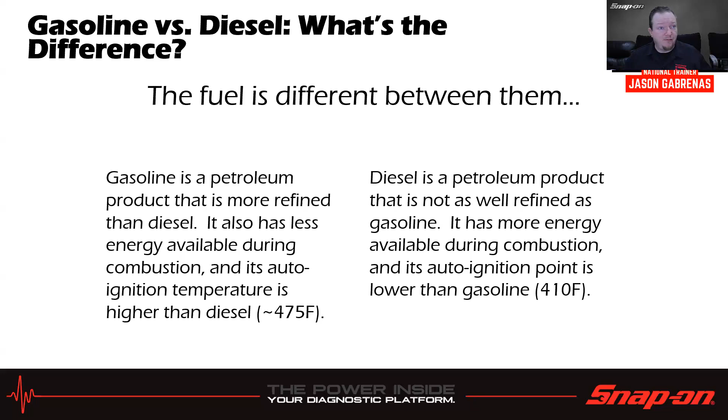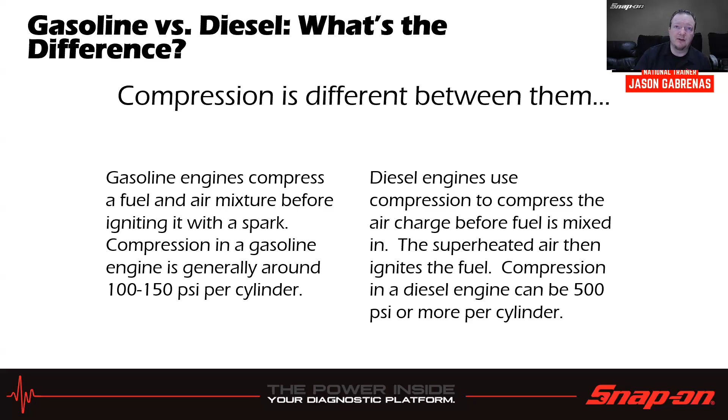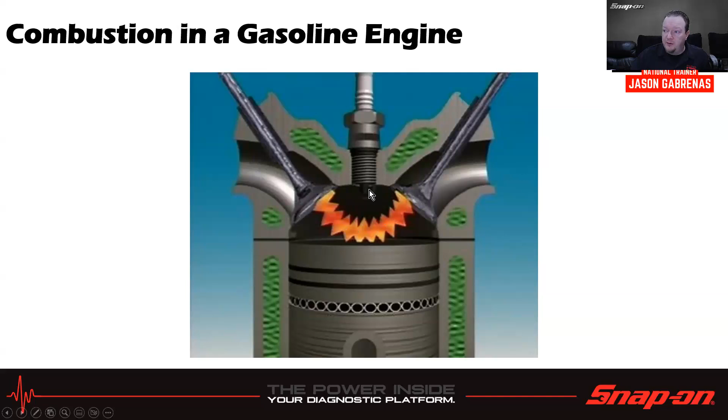The way they use compression is different as well. Gasoline engines compress the fuel and air mixture before igniting it with a spark. Compression in a gasoline engine is generally around 100 to 150 psi per cylinder, versus a diesel engine, which uses compression to compress the air charge before fuel is mixed in. It gets superheated air in there, then squirts the fuel in, and it hits the auto-ignition temperature and ignites. Compression in a diesel engine can be 500 psi or more per cylinder, just because of how the cylinder heads are designed. For example, in a gasoline engine we have a decently large combustion chamber in the cylinder head - the piston goes up, compresses the air and fuel, and then we light it with a spark. Versus a diesel, the piston is basically the combustion chamber, so it goes almost flat to the head, and then it sprays fuel into the piston, and because of the superheated air in there, it ignites. By design, though, this can create NOx emissions and can run kind of lean, so we have ways of controlling that we'll talk about later.

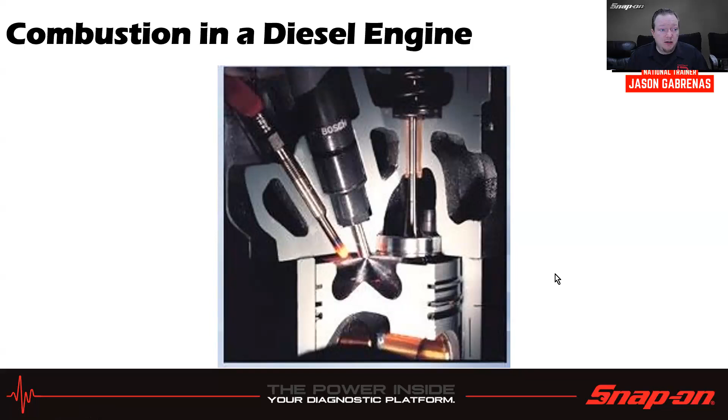The first part, though, we're going to talk about the fueling system, because that's one of the major differences between them.

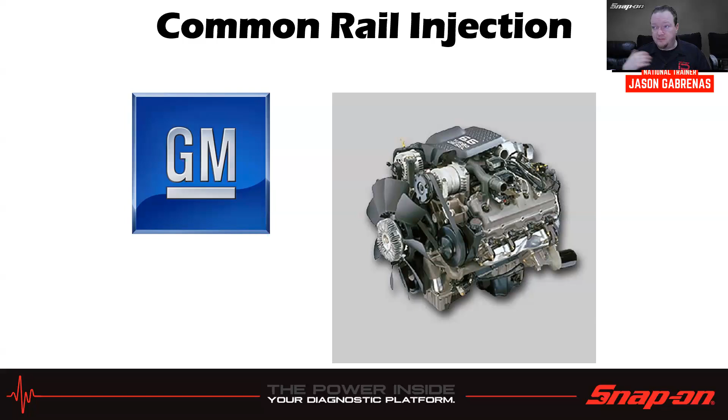And you know what? The lines are blurring a lot now. With gasoline direct injection engines, a lot of these principles and setups are going to be very similar between a diesel and gasoline, because many diesel engines are going to be direct injected. So, for example, this common rail injection that they would use on the Duramax, on the GM, and also the Dodge 5.9 and 6.7, they also use common rail injection.

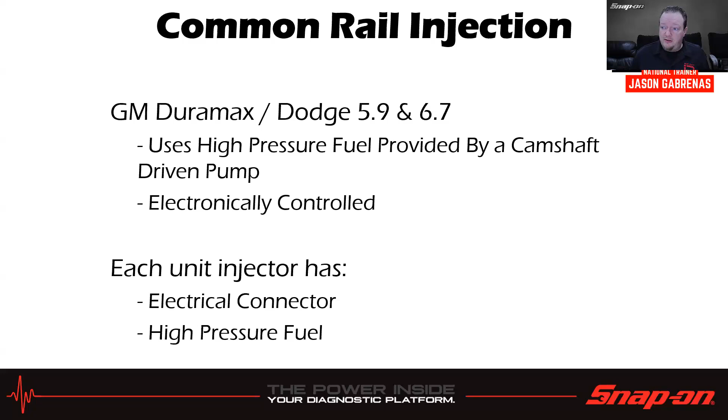These are going to be more your fairly standard poppet style injectors. They use high pressure fuel provided by a camshaft driven pump, so it has a lift pump that increases the pressure. It's driven off the engine, and of course the injectors are electronically controlled. Each unit injector has an electrical connector and high pressure fuel at it.

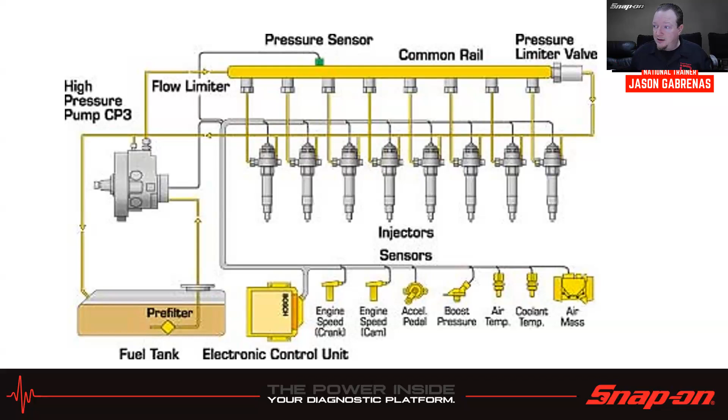You ever seen a water jet? Same type of principle, right? So it's very, very high pressure, and it can cut off digits and so on. So you don't want to mess around with that.

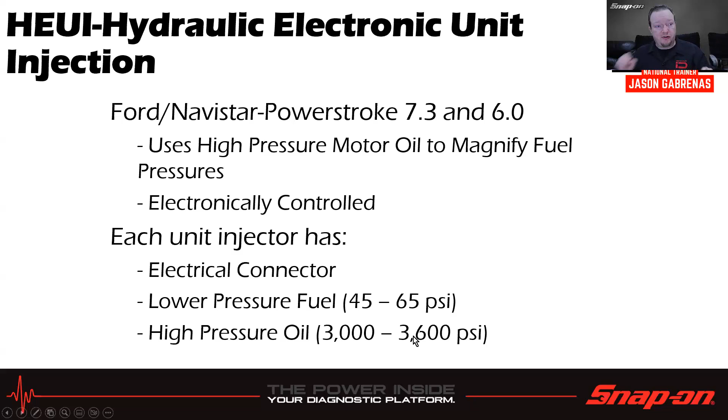Ford, on the older Fords, they use what they call hydraulic electronic unit injection. So what this does is it uses high pressure motor oil to magnify the fuel pressures. The fuel going in is only your standard, maybe gasoline level, 45 to 65 psi. And then they use high pressure oil inside the injector in order to increase the amount of pressure on the fuel coming out the other end. So this is kind of how they got around it, right?

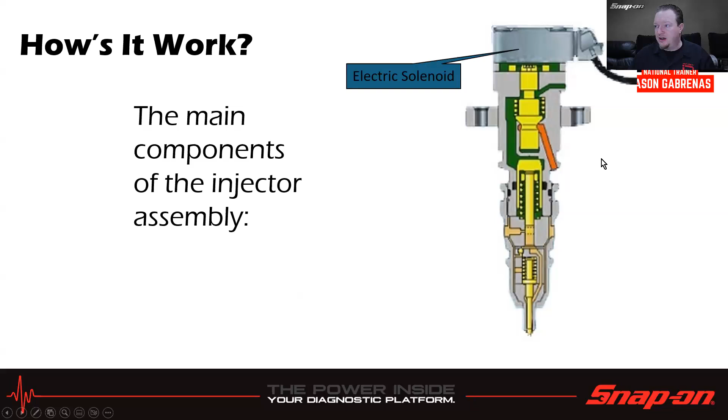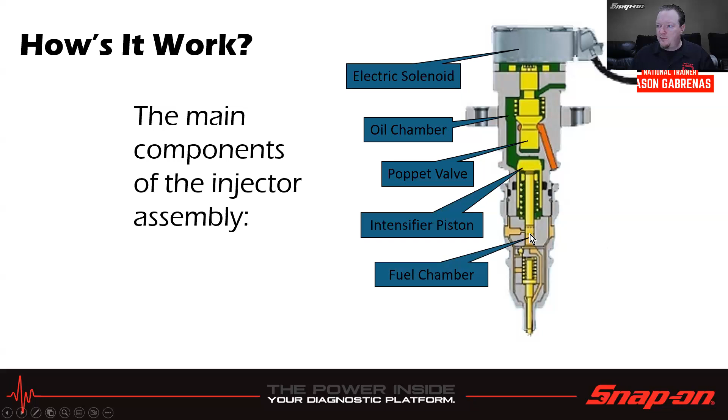The main components of the injector assembly are going to be the solenoid at the top, which is going to open and close this guy. We have the oil chamber in here, which the oil will flow through. Poppet valves, which are going to open and close. Intensifier piston, which is going to increase the amount of pressure on the fuel. Fuel chamber in here, and then the nozzle down here at the end.

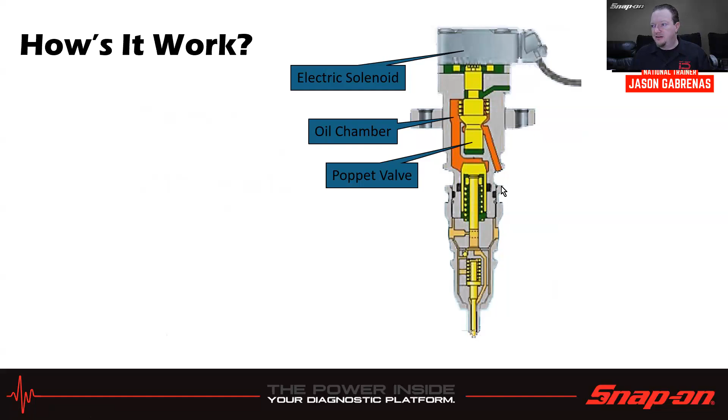The solenoid will open up the oil chamber, allowing that high pressure oil to flow in. We have O-rings around here, and the oil flows in from the side. It's going to kind of push up on this, and then push down on this piston. As it pushes down on the piston, there's going to be fuel down here on the bottom part. And as that fuel goes in here, the pressure is going to increase because we have a large surface area there and a small surface area there, due to multiplication of forces.

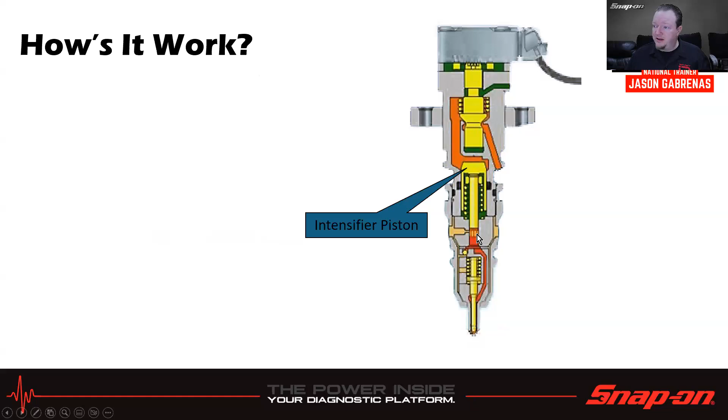It is going to take that force and multiply it and bring it down here and increase the pressure of the fuel. Once that fuel pressure is able to overcome the spring tension here, it will push the nozzle back and it will start spraying fuel. And that's how that works. Right, so there we go.

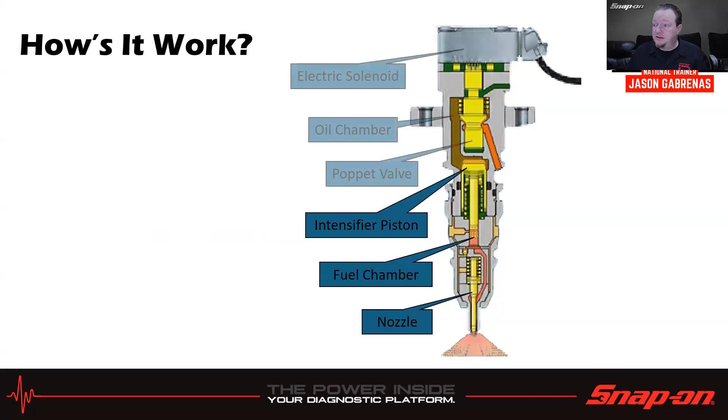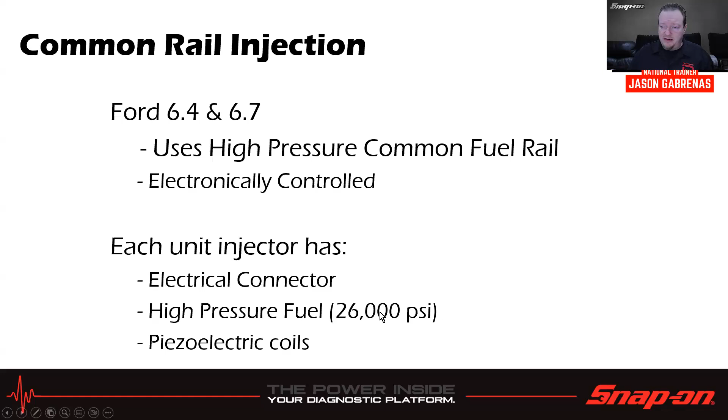Now the newer Ford engines, 6.4 and 6.7, they also went to a high pressure common fuel rail, but they use a different type of injector. I'm sure some other engines use this injector too. We see these a lot in the gasoline direct injection engines. Each injector has an electrical connector, high pressure fuel, 26,000 psi or so, and piezoelectric coils. So that's a slightly different working injector.

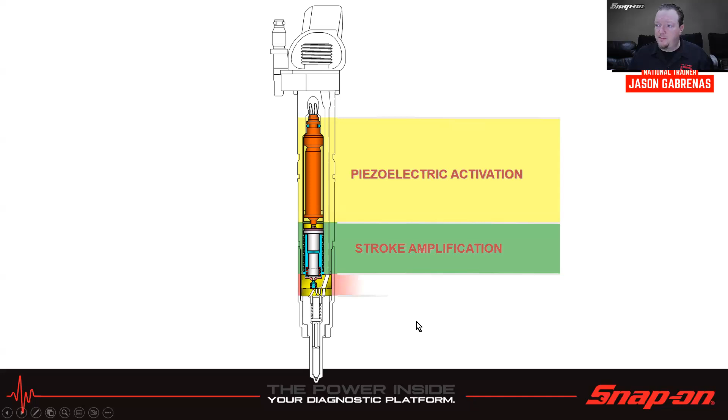We have stroke amplification in here that's going to work on a similar principle to those hydraulic units, where it's a small stroke on one side, bigger stroke on the other side due to multiplication. Hydraulic control in the middle, or kind of towards the end, and then we have fuel atomization down at the very end by the nozzle. So if we were to take a look at the piezoelectric actuator, we have a piezoelectric stack, which is going to be these thin wafers.

Now, if you know how a knock sensor works, maybe you do or maybe you don't, but a knock sensor works by when it vibrates, when it has motion applied to it, it generates an electrical current. We can do the same thing in reverse. We put an electrical current in, and it's going to make it move. So instead of taking mechanical motion and turning it into electricity, it takes electricity and turns it into mechanical motion. So we apply electricity, they go out. Take the electricity away, they come back in. So by doing this, we can make them move.

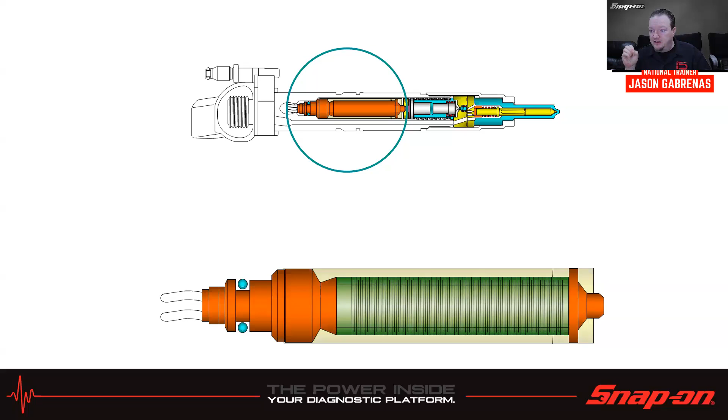Now it's a very small movement, so we need to be able to amplify that movement. So we have this amplification chamber here. When no fuel is in here, it's just going to sit there and go back and forth on the spring, and nothing really happens. Once fuel is in there, however, we can hydraulically couple these two pieces together, and it's going to change the stroke length. So I have a small amount of stroke going in, a large amount of stroke going out. It pushes, and it pushes the other end because we have the diesel fuel in the middle.

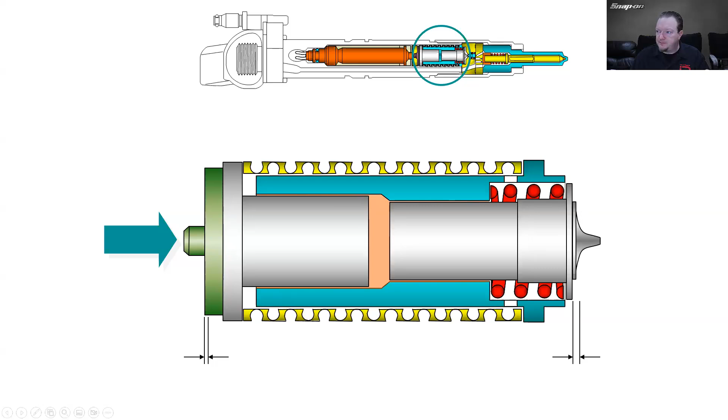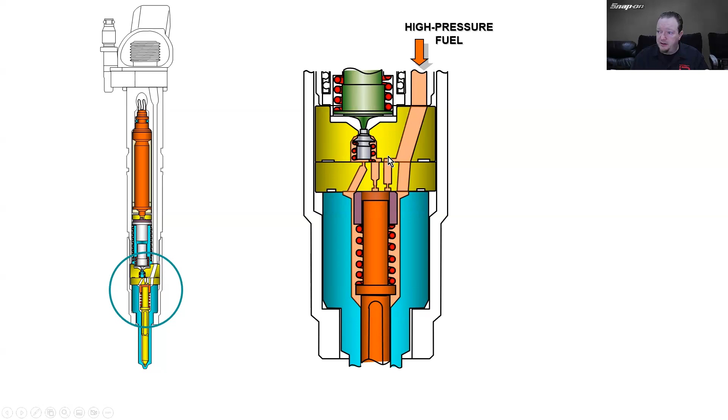So it intensifies it, just like on those hydraulic units. We have high pressure fuel going in, and that increases the stroke. So we have the high pressure fuel going in here into the system, and then it goes around and pushes down on the pintle to keep it closed. When we remove that, however, by moving the stroke back and relieving the pressure that's holding it closed, it allows the fuel to get around and allows it to spray.

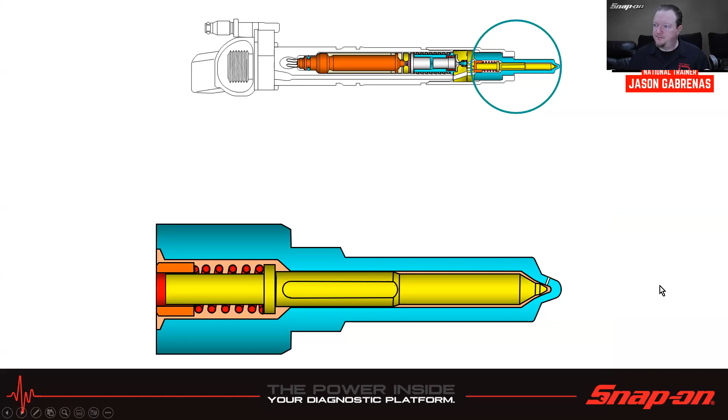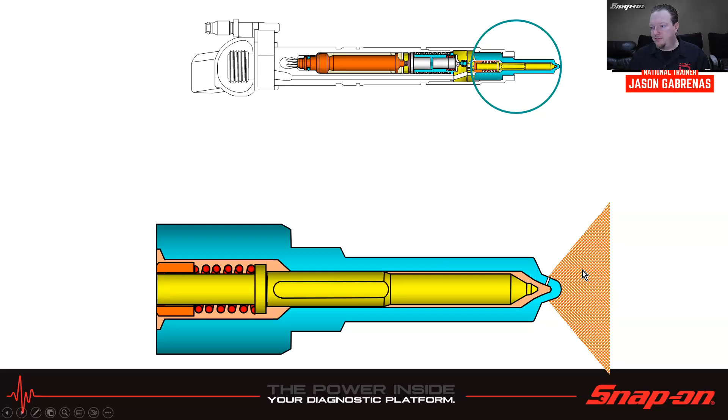So it's going to look something like this. Fuel holds it closed. When we relieve that fuel, it's going to do this, and then it's going to open and spray, just like that. So if I have high pressure fuel over here, once this opens and moves away, then we open the injector and spray. So it's really pushing the injector backwards, or pushing the nozzle backwards. It does that.

So with your scan tool, many diesels at this point need something done with the fuel injectors in order to get the flow rate correct when you replace them. So injector quantity adjustment is one example on a Ford. You're going to use a 10-digit code on top of the injector. Don't confuse characters like 8 and B, or D and 0.

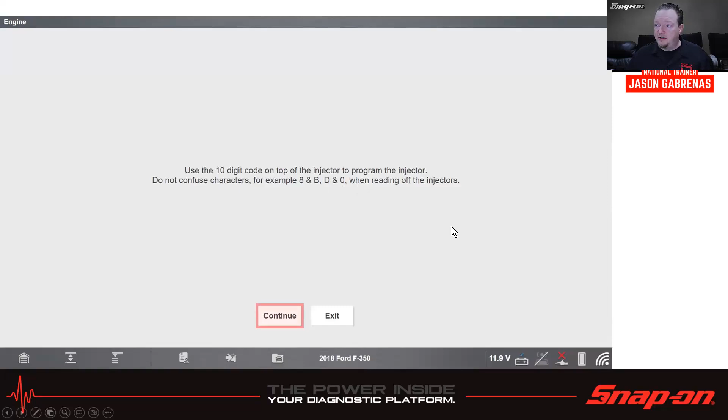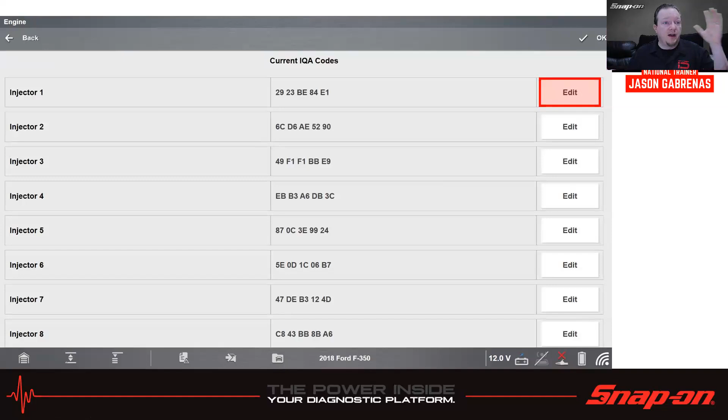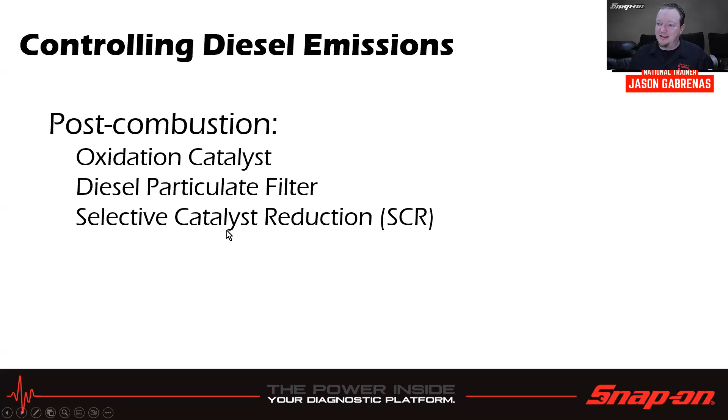So that's one way it's different, but it's very similar if you think about it. In gasoline direct injection and diesel injection, it's going to work very similarly, especially now. No ignition system, though. They do, however, have emission systems, and they are a bit more complex than on your gasoline-powered vehicle, because there's a lot more going on, and a lot more stuff they need to take out of the exhaust. So post-combustion, they're going to take care of it with the oxidation catalyst, the diesel particulate filter, and the selective catalyst reduction system, the SCR.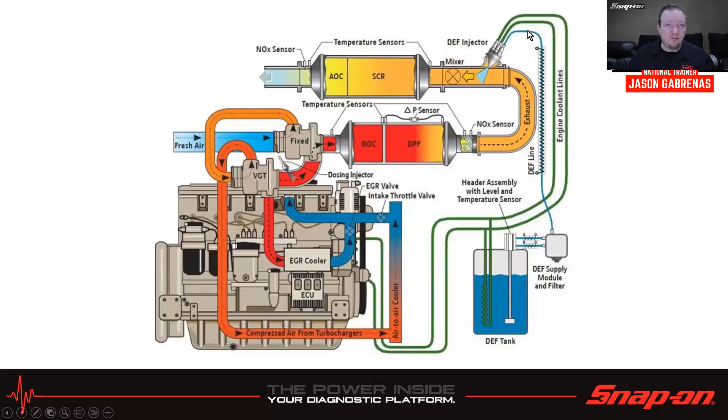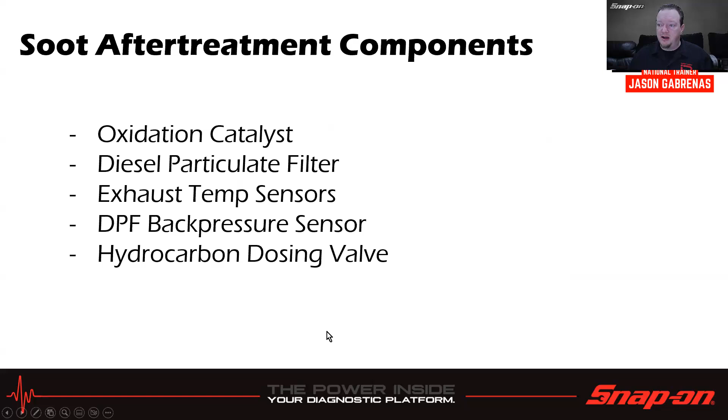So for exhaust after treatment, soot after treatment, we're going to talk about the oxidation catalyst, the diesel particulate filter, exhaust temp sensors, DPF back pressure sensors, and hydrocarbon dosing valve. And the main thing we're worried about in here is the diesel particulate filters, or DPFs.

So then the vehicle would then need to know, all right, I got to burn this off. Now, when I first heard about this years ago, I thought it was pretty wild that this was a thing that they even said, yeah, let's do.

Because what's it doing? So I'm driving down the road. Any of the soot that's in my exhaust gets collected in here. Then it gets filled up to a certain point. So I got a lot of soot in there. And then I'm going to burn it off. So I'm taking a lot of soot and dumping it in one place versus having just a little bit of soot in multiple places driving around, you know?

I don't know. It seems like we're just kind of kicking the can down the road at that point, right? So storing up all these emissions, and then we just burn it out the back of the tailpipe when we do a regen. Right? So I don't know. But that's what they're doing.

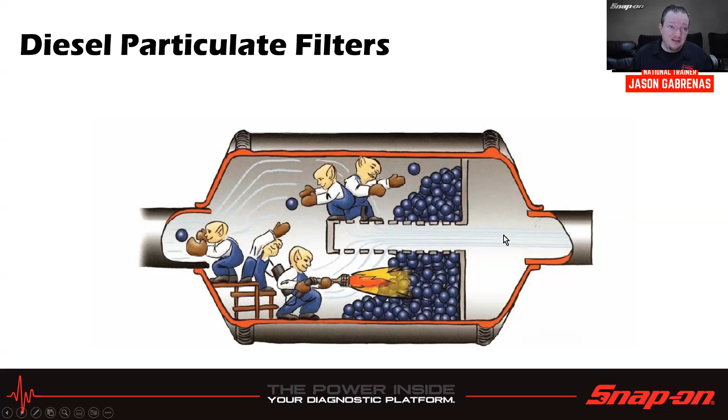And also gasoline particulate filters are a thing now too. So we'll be seeing those more and more on gasoline engines, and it's the same type of principle. So inside those DPFs, there's opposing honeycombs, and they can flow through and collect in these honeycombs.

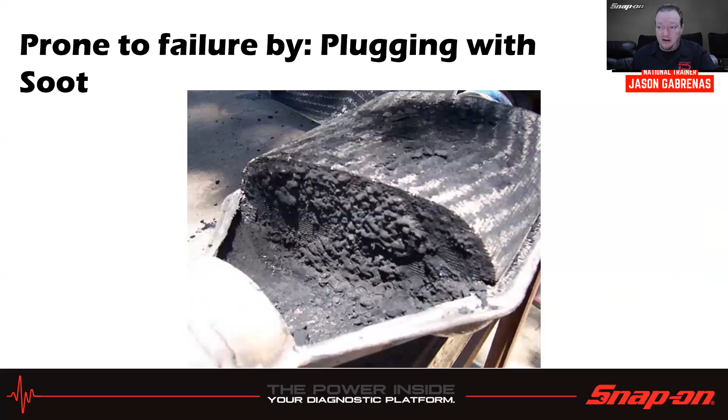But once it's full up, it's full up. And usually once it's full up, you're going to get a code. And usually also when it's full up, you're not going to be able to regen it. You're going to have to replace it. So that could be a problem, and a lack of maintenance could generate this problem.

Speaking of regens, we have a few different conditions where we would regen and remove that diesel, or the soot, from the DPF. So when the DPF temps are high, a passive regen is when the DPF temps are high enough to burn the soot from the DPF without needing extra fuel. Only happens under high load situations, like going up a hill or something like that, or towing, I suppose.

Active regen can be initiated by the PCM or by a scan tool. Extra fuel is going to then be added to the exhaust to raise DPF temps to approximately 1,025 degrees Fahrenheit to burn that off if it gets really hot.

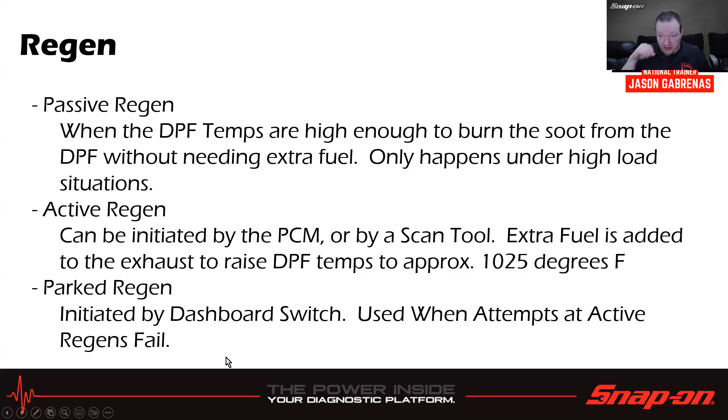And then there's also a parked regen, which can be initiated by a dashboard switch. It's basically the same thing as an active regen with a scan tool. It's going to be used when attempts of active regens fail. So the little switch comes on, and then it just does it as it's parked.

Now, with these systems, with the DPFs and the SCRs, they can be set up in different ways, different configurations. You can have DPF first, or you can have SCR first, or what have you. But we're going to be dealing with a lot of NOx, or a couple NOx sensors anyways, multiple exhaust gas temperature sensors. Hydrocarbon injector, that's what lights off the DPF and heats it up.

DEF injector for the SCR system. There's a differential pressure sensor that goes in there in the middle, and that measures the pressure going into and out of the DPF, so it knows when it's clogged and when it needs to regen. And then, like I said, multiple exhaust gas temperature sensors and so on.

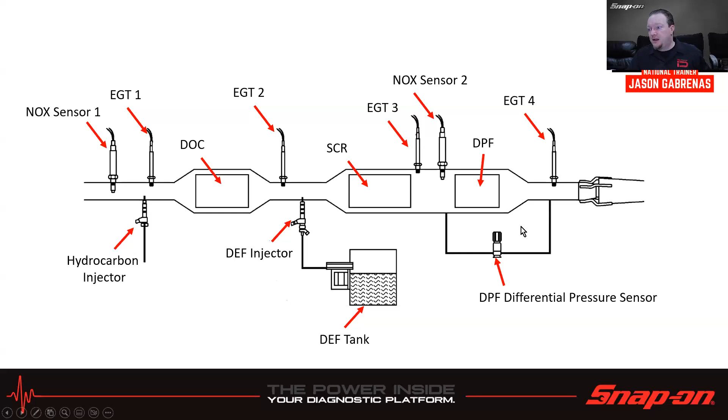So oftentimes, things like the NOx sensors anyways, might need to be reset or relearned on the vehicle. Could be the exhaust gas temperature sensors, could be the injectors. There's multiple functional tests that you might need to use for the DEF system. And differential pressure sensors is ways we can measure that too and test it. We'll see a lot of that in a little bit.

So with those EGTs, there's multiple EGTs, as I said. You're going to have one before it gets into the system, and then multiple along the way through the system, so it can measure temperatures, making sure things are going as they should, making sure the temperatures are correct. So it should be cooler in, then after I light the injector there, it's going to be a lot warmer over here. So I should see warmer over here, and I guess a little cooler over there on the other side after I've burned off the soot. So that's kind of how it works. You're able to see it.

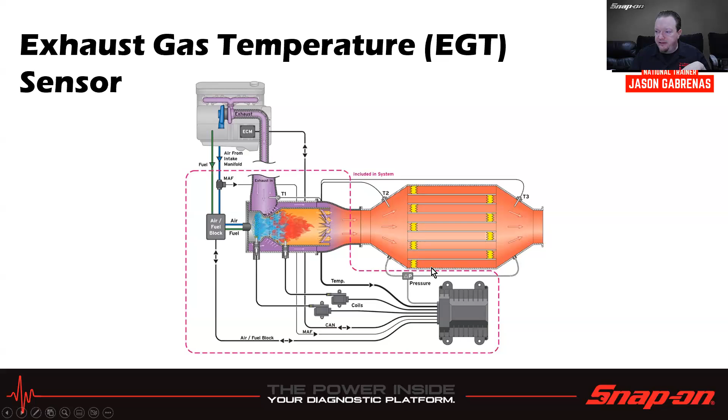Now, the SCR system, which oftentimes is used in conjunction with the DPF, consists of your diesel exhaust fluid, which is 1/3 urea and 2/3 water. That's the blue jugs you see everywhere. Or if you're around, like where I live, there's a gas station down the street that has it right in the pump, with a DEF pump off to the side.

ECU controlled injection, just like any other fuel injection system. 1 gallon urea, or actually wouldn't be fuel, it'd be DEF, but yeah, same idea. 1 gallon of urea treats about 100 gallons of diesel fuel. This is used to allow them to tune the timing. So I added an EGR to the vehicle to reduce some emissions, but then I get a 2% decline in fuel economy by doing that. But by adding an SCR as well, I can either offset it completely, or get a 2% to 5% increase in fuel economy, so I could even gain some fuel economy with that.

So SCR allows return to normal injection timing, which restores the fuel mileage. Part of that, we have the SCR catalyst itself, the decomposition tube, the DEF injector, DEF pump, tank and lines, NOx sensors, and the ammonia sensor. We're going to see why that's important in a minute.

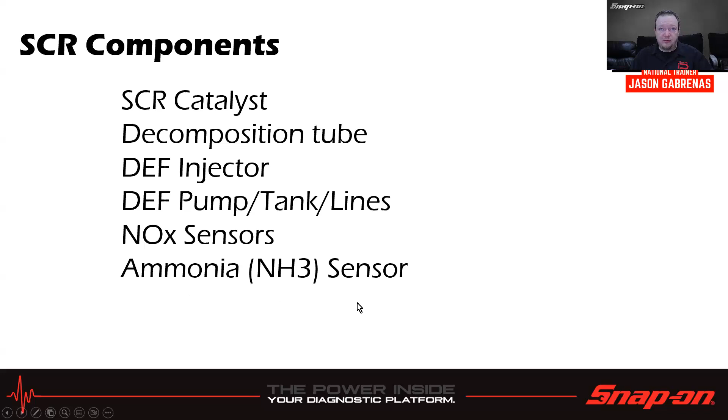Here's an example of what the DEF injector would look like. You see how it's kind of just mounted in the exhaust there, and it just looks kind of like a normal top feed fuel injector. We've got a little quick connect there, and a little 2-wire injector plug, and it's also heated and/or cooled, I guess.

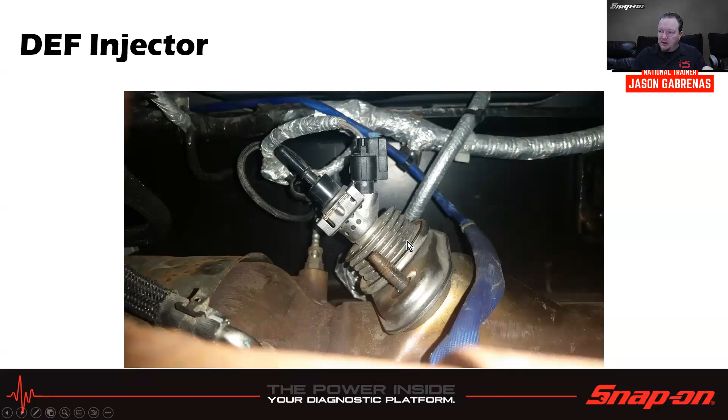There's also plumbing involved, right? So there's that quick connect, the other end of the quick connect there. So the tank, the lines, the pump, the coolant heater or electric heater itself, and level sensor. So once again, in cold weather, that needs to be heated, because remember, it's 2/3 water, 1/3 urea.

Now, NOx sensors are important with this because that'll determine the inlet and outlet NOx readings. And what does an SCR system do? Well, it reduces NOx in the exhaust. It can be used in open or closed loop systems. Oftentimes there's like a little board there, and that has to be reset or relearned.

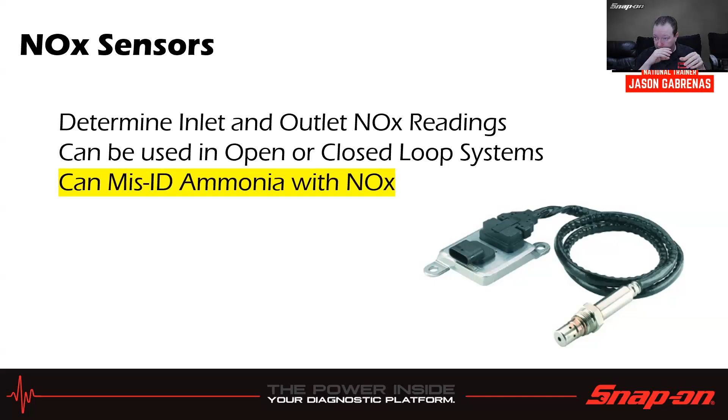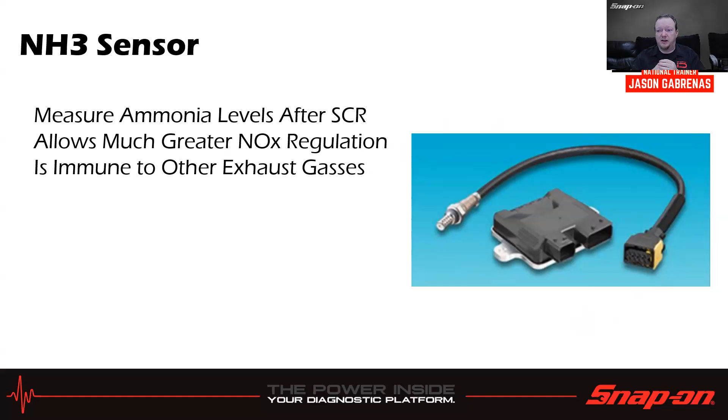One downfall, though, is it can mis-ID ammonia with NOx, because of the way it senses the NOx, it can sense excess ammonia in there. So if I have a problem with the urea injector, which is basically turning stuff into ammonia, it can misinterpret it and throw the computer off so it doesn't know what's going on, which is why some vehicles also have an ammonia sensor. This one won't be fooled by other things in the exhaust gases, but it measures the ammonia levels after the SCR. So it can kind of be a check on the NOx sensor, allowing much greater regulation of that. And like I said, it's immune to other exhaust gases.

So how it kind of works, we have our inlet NOx, which reads the amount of NOx that's in the actual exhaust, and then the outlet NOx, after we inject the urea in there. In this case, the DOC is first. You've got the catalyst, you've got the DPF collecting the soot, and then it injects the urea in there, and then my SCR is going to do the catalyzing. You also have a slip catalyst at the end. Theoretically, as long as everything's working the way it should, NOx should be much higher on that side than it is on that side.

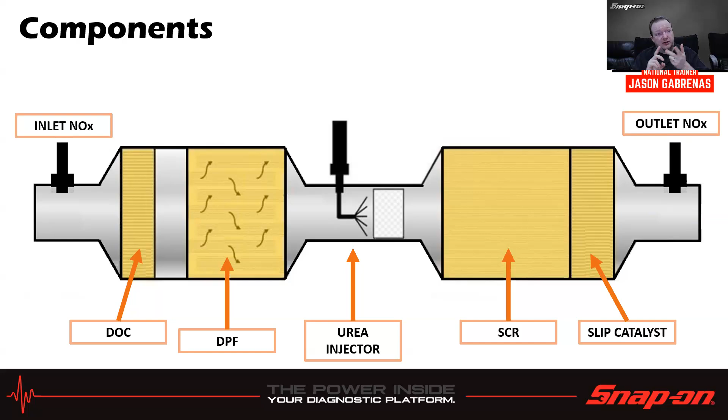But remember how I said NOx sensors can fail, and NOx sensors can misidentify ammonia as NOx as well, so that could throw you off. So we actually have a special tool just for this. If you work on diesel vehicles and you want to see if that SCR system's working properly, we actually have a system that will detect only NOx. That's all it does. It's a NOx sensor.

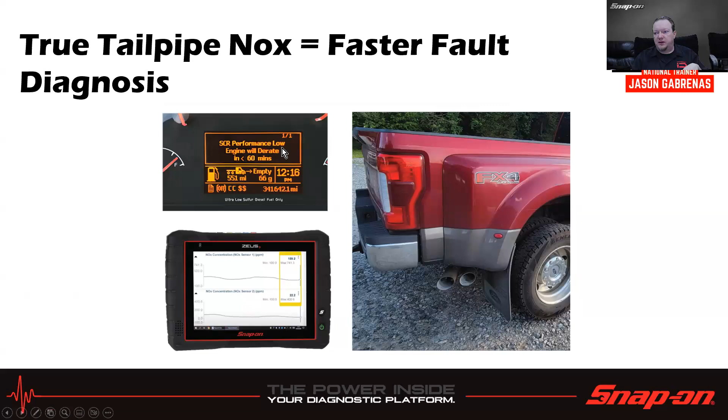If it gets low performance readings, it'll derate, things of that nature. And like I said, it might not necessarily even notice it correctly. So there's this little handheld thing, it's like a little tailpipe sniffer. It's actually based on our 5 gas analyzer, but it's a 1 gas version.

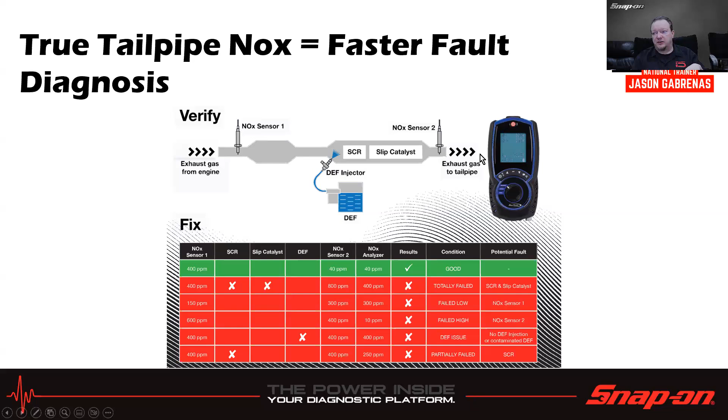It just reads NOx. It's able to verify that my NOx sensors are working. So for example, if my front NOx sensor is at 400 parts per million, and my rear NOx sensor is at 40 parts per million, and the analyzer agrees with this, then it's okay, all good, it's working. It's reducing it by 90%, down to only 10% of that.

If it's reading 400 parts per million on the way in, 800 parts per million on the way out, and the NOx analyzer is just reading 400 parts per million, well, we've got a total failure there. SCR and slip catalyst are most likely the fault.

If my front NOx sensor is reading 150, my rear NOx sensor is reading 300, and my analyzer is reading 300, then that means my first NOx sensor has failed to the low side. If I'm reading 600 in, 400 out, and I'm only getting 10 out on the analyzer, well, that means the SCR is working.

But my NOx sensor on the backside, sensor 2, has failed high because it's reading too high. But actually analyzing the NOx coming out the back end, it's fine.

If I have 400 in, 400 out, and I'm reading 400, then it's a DEF issue. It's probably not injecting it, or it's contaminated. And then if I have 400 going in and 400 coming out, but I'm reading 250, that means it's partially failed.

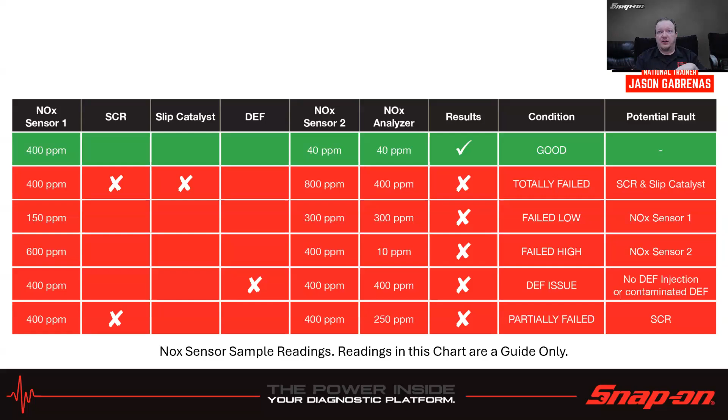Once again, it can misidentify urea for NOx, so just because it's reading it on the back end doesn't mean I'm reading what's truly in there. Now, this is a guide, it isn't 100% what you'd necessarily use, but be aware that there is a special tool for that we do have. You could do it with a 5 gas too and just read the NOx. But one of our industrial DSDs actually came up with that idea and helped develop it, so kudos to him.

Speaking of after treatment and problems like that, this actually came from our customer care department. I was sitting in on some every Wednesday - we have about an hour where we listen in on customer care calls live. They just answer them and we listen to what's going on in the call. This we heard one time, and it's fairly common apparently.

If you have a P242F, you might not be able to do a regen. It may not allow you to do a regen, and you might think that the computer or the scanner's not working properly, which is not exactly what's going on. It is that we have an issue with the code.

This basically means that the exhaust filter is full, power reduced, see dealer. So in that case, it's plugged - the DPF is plugged, and you most likely need to replace it.

Possible causes here: progressive damage to the after treatment system from an engine failure, including but not limited to excessive fuel, oil, or coolant in the after treatment system, may contribute to this high pressure related fault. The DPF could be plugged. Also operating in light load conditions that prevent exhaust temperatures from being high enough.

Now, I will say the customer is going to get plenty of warning of this because they'll keep getting things on the dash saying, hey, you need to do a regen, you need to do a regen, and finally it goes into derate and throws the code.

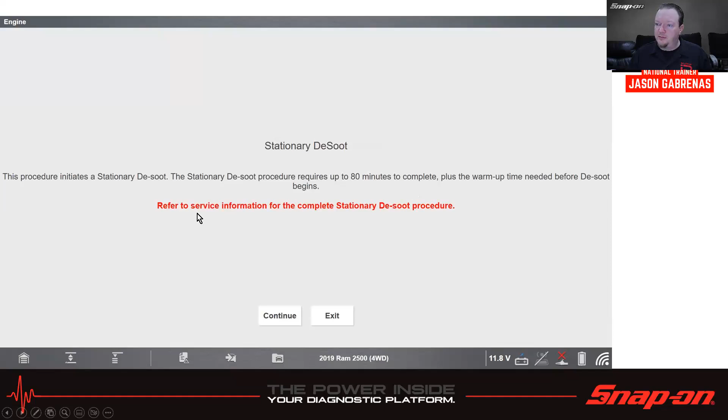Initiates a stationary desoot. The stationary desoot procedure requires up to 80 minutes to complete, plus the warm-up time needed before the desoot begins. Refer to service information.

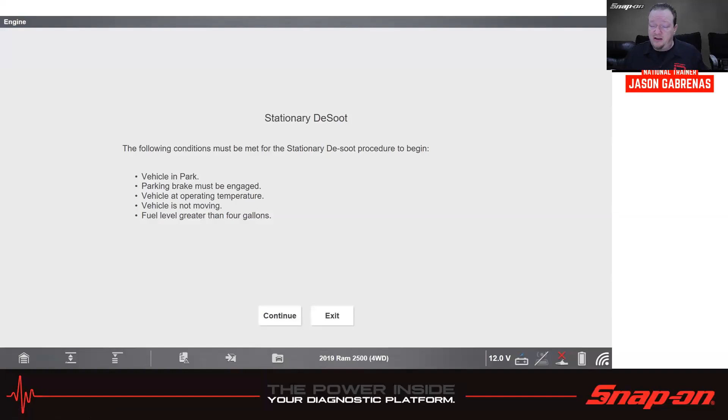Vehicle needs to be in park, parking brake engaged, vehicle at operating temperature, vehicle not moving, and fuel level greater than 4 gallons. That's important - if you only have 2 or 3 gallons, almost on E, then you're not going to be able to do it. Because remember, it injects diesel fuel into the exhaust to do that.

Correct any active DTCs not related to the desoot. Stationary desoot will be aborted if any of the enable conditions are no longer met during the course of the procedure, including fuel level, including that P242F.

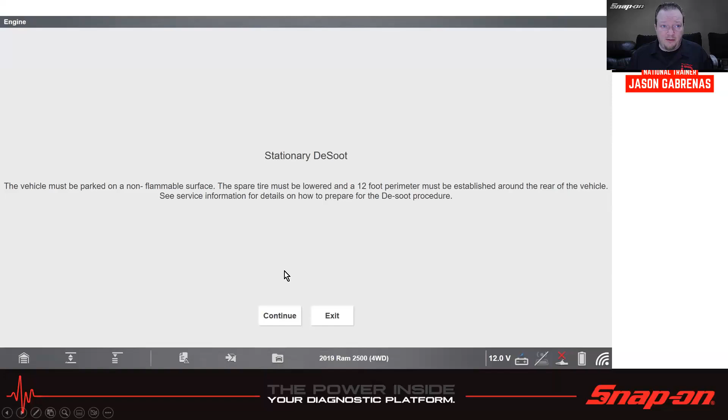Vehicle must be parked on a non-flammable surface. The spare tire must be lowered, and a 12-foot perimeter must be established around the rear of the vehicle because the tailpipe is going to get hot. Remember, the exhaust gases will be about over 1,000 degrees. And you go through, and then it will go through the procedure.

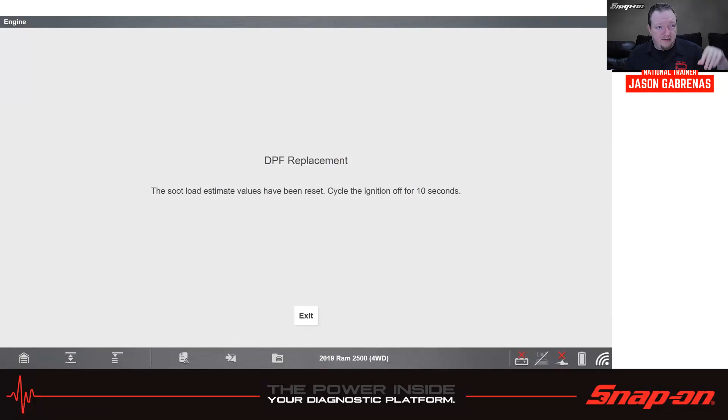There's also a DPF replacement, so if I can't do a desoot on it and it's clogged and I need to replace it, I can go in here and do a DPF replacement. What that does is it resets the soot load estimate values whenever the DPF has been replaced. The engine can't be running to do this. Go in there, and then it'll just reset. It's a simple wait 10 seconds, and it resets it. Cycle the ignition off for 10 seconds, and you're good to go.

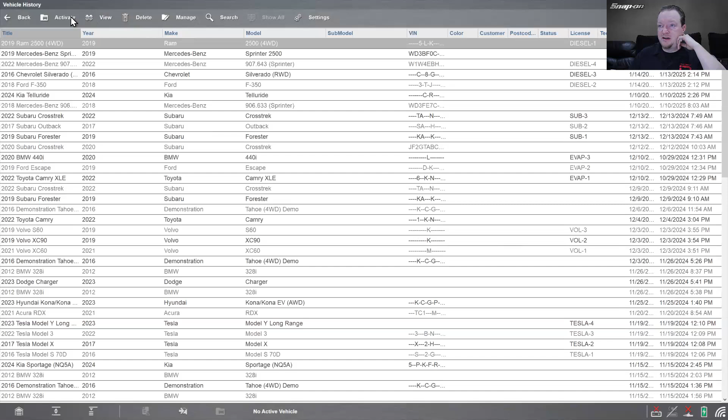Let's look at some other stuff that's in there on the tool, because there's a lot of good stuff in the tool. So let's see. First one is the RAM. So we were just looking at that. Okay, it's behind security, of course.

All right, so let's go into engine. See what we can see. Functional tests. Let's see. What would be diesel specific? Lift pump, I guess. Yeah, pretty much it. Diesel specific anyways. You're going to see some of these tests with gasoline engines too.

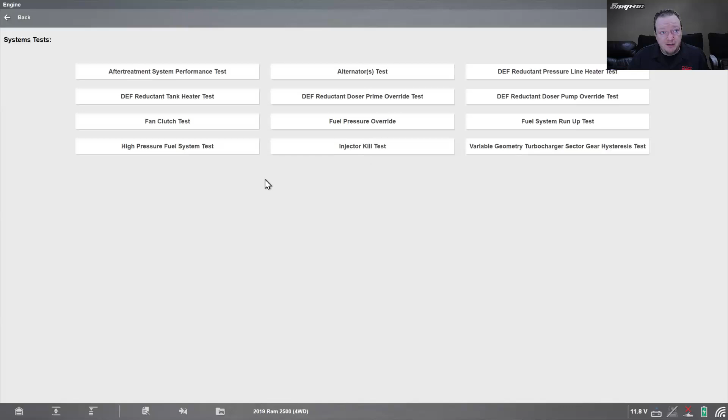After treatment system, DEF reductant, fuel pressure override, fuel system run-up test, variable geometry turbocharger, sector gear hysteresis test. That's a mouthful. Injector kill test. That's useful for seeing misfires because remember, there's no spark, just fuel. If we kill the fuel and it doesn't run any worse, then we know that injector is probably bad. High pressure fuel system test for the high pressure fuel system.

Then miscellaneous functions, DPF replacement we just saw, stationary desoot we just saw. Let's see. Idle shutdown timer, because of the diesel idle, you can change the length of the timer. Reset injector compensation value, so that would be like the injector quantity adjustment on the Ford. So you'd have to do that when you replace injectors.

All right, and then let's just look down here really quick. Dosing control units down here as well. So there's some miscellaneous functions in there. Actually, that's just ECU information, and the codes will throw in the engine. That's what that's going to tell you. So it's listed separately, but you can get to it all through there. And then variable geometry turbo as well, so that's just going to be ECU information.

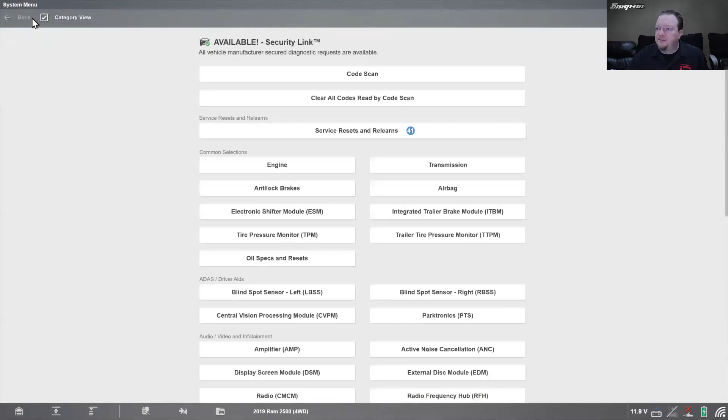So let's look at guided component tests as well. Engine, and let's see. So what would be relevant to all the stuff we talked about? DEF systems - we got the injector pump, the injector, the line heater, tests for those. Let's see. Exhaust gas temperature sensors, exhaust pressure differential sensors, exhaust pressure sensors, fuel heater, in the fuel system, the injector itself, fuel control actuator, all sorts of things there.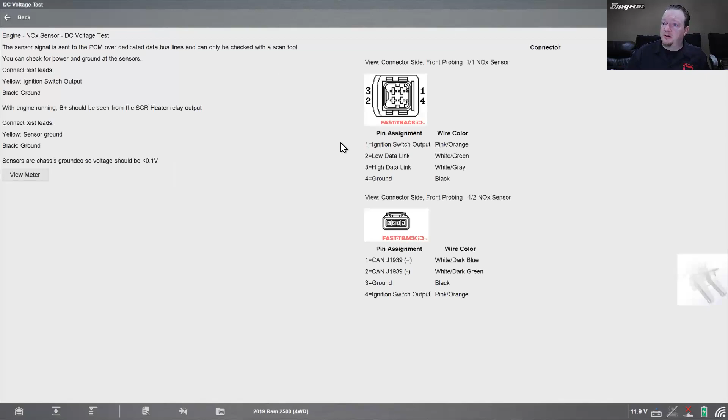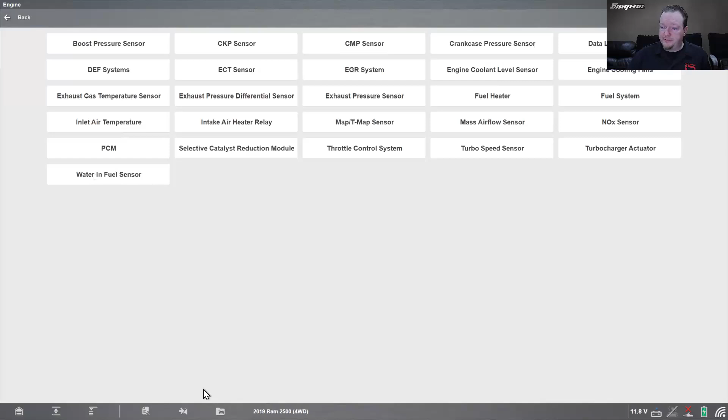Let's see, NOx sensor for sure. So you can go and you can do a voltage test. This actually runs over the CAN bus. Selective catalyst reduction module - it's going to give you the pinouts. Water in fuel sensor - be important. All sorts of different tests that you can do in the guided component test as well. Next one, let's do the Ford.

So on the Ford, we have in the engine, functional tests, special functions. So DPF parameter reset, that's like a reset when you replace it. Power balance, you can check whether or not it is misfiring. You can also turn the injectors on and off. So like this, you get a little graph, and then you can turn the injectors on and off, and then you'll see how they contribute.

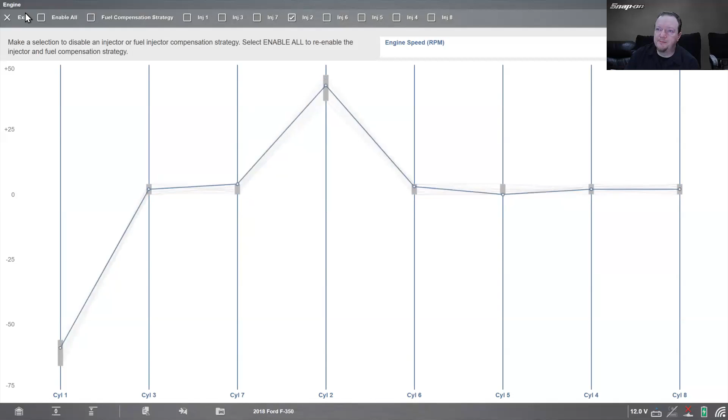So that's helpful. Glow plug monitoring self-tests, injector electrical self-test, DPF dynamic regen, static regen, injector quantity adjustment we showed earlier, SCR different system parameters, emptying, dosing, refilling, visual leak checks, and the like. So a lot of stuff there.

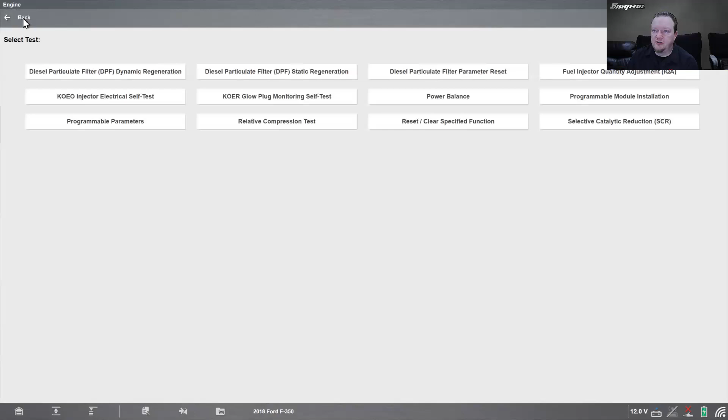You can see all the SCR stuff's integrated with the engine, and then let's just go down here and check real quick. Nothing related on that one. So that's all in one place.

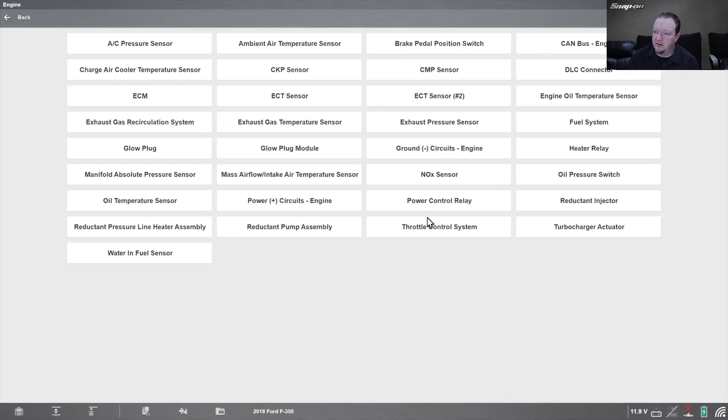Then for guided component tests, we can see things like your EGR system, EGTs, exhaust pressures, reductant injector, reductant pump, reductant pressure line heater assembly, turbocharger actuator for the variable geometry turbocharger. There you go in there. That's just a pretty simple one, on and off. So lots there. Let's pull up a Chevy.

So on our Duramax, in there we've got functional tests, DPF tests. So regen enable, service regen, pressure sensor reset, catalyst reset.

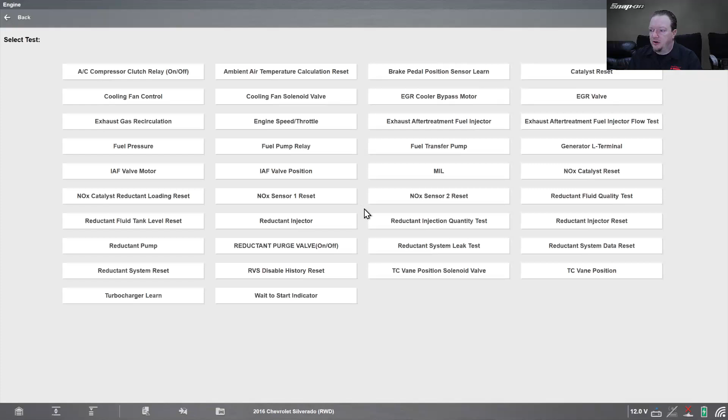Reductant system malfunction warning service bay test - so as a service bay test you can do on the reductant system, that's the SCR system. Cylinder power balance again, output controls, NOx sensor reset in there. Reductant injector, tank level reset, catalyst reductant load and reset. All sorts of resets in output controls, just so you know that's where they put them.

Now let's see if this one has a separate glow plug control module in there.

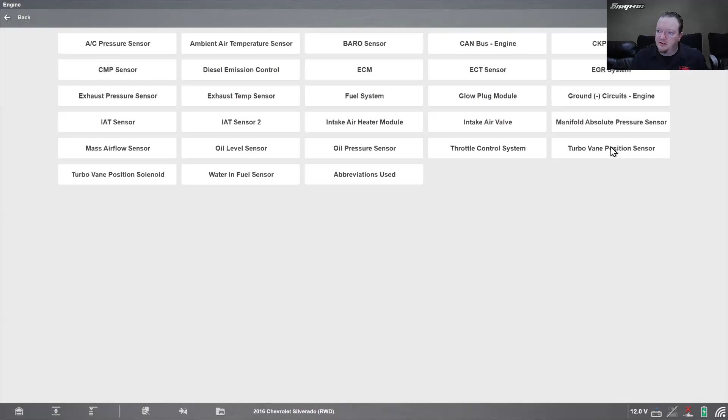And then if we go into guided component tests, same type of thing - DEF injectors, purge solenoid, hydrocarbon injector, NOx sensor. That's pretty much it. Exhaust pressure sensor, exhaust temp sensor, turbo vane position sensor, all that stuff, position solenoid. All basically diesel specific.

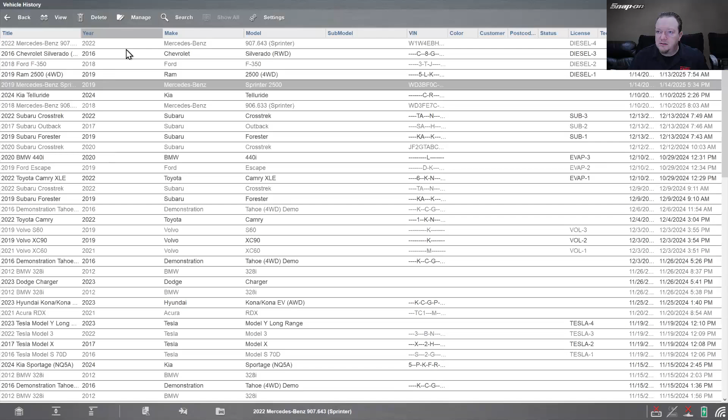And then lastly, we'll do the Sprinter. So those are everywhere, all over the world. Actually, I wanted to pull up the 19 Sprinter. Let's see, do this, do this, do this. There we go. Okay, so we'll go in here - Sprinter.

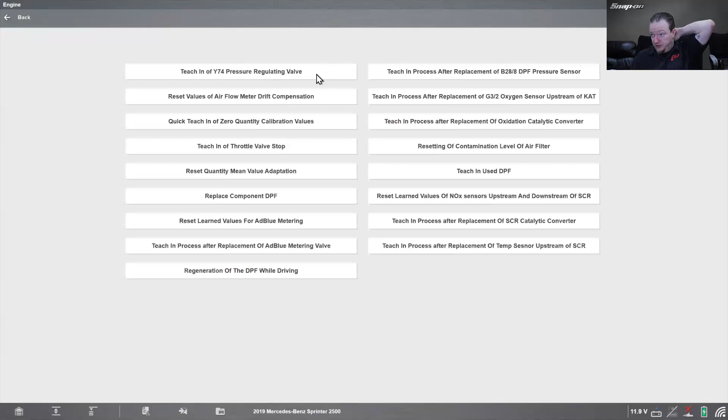All right, so in the engine here, we're going to have special functions, adaptations. So there's going to be a few things in there, like the process after replacement of the DPF pressure sensor, after oxygen sensor upstream of CAT, after replacement of oxidation catalytic converter. Let's see, teach in used DPF, reset learn values of NOx sensors - so if you replace the NOx sensors on this vehicle, you need to relearn them. After replacement of SCR. So definitely a lot of different things.

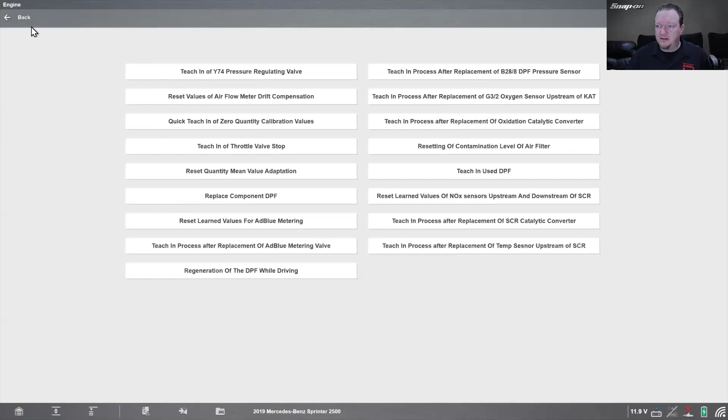And there's a regen right there while driving. Replacement of AdBlue metering valve - so there's a couple AdBlue things in here. Output controls, diagnostic glowing, cylinder deactivation, EGR, injector programming once again - got to go in and code those injectors.

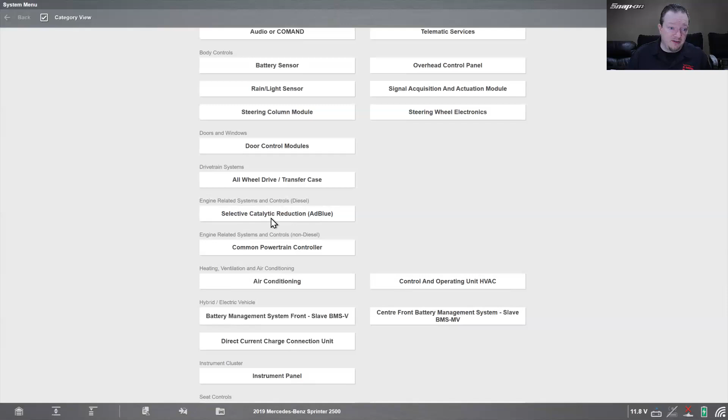And then on this one, this confuses people too because they don't know where to find the AdBlue system. They call it AdBlue, or as a selective catalytic reduction, because it's got the blue DEF fluid, right? So AdBlue is in there.

And I just got to pick the right variant. And functional tests - it's going to be resetting calculated fill level, AdBlue return, visual leak test, dynamic test of AdBlue delivery pump. Actuator tests in there, a couple different metering valves and heating tank heating elements and stuff like that.

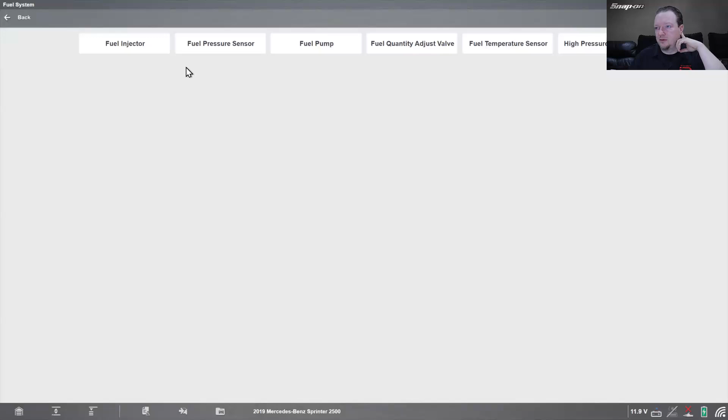And then if we go over to guided component test here, you can see temp sensors, pressure sensors, water and fuel sensor, glow plug module. Go to the fuel system - you're going to get your fuel injectors, fuel quantity adjustment valves, fuel temp sensors, high pressure fuel pump, charge temperature sensor, DPF differential pressure sensor, DPS. That's going to tell you all about it.

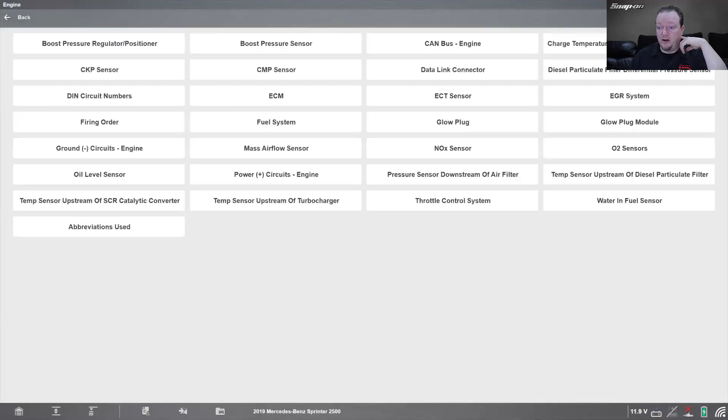So a wealth of information within the scan tool. Like I said, this is mainly North America. In Europe, it's going to be the same type of deal because they're actually bigger on diesels in Europe - not sure if you know that, if you're from North America you may not be aware of that. But yeah, big diesel over there, but they're small diesels, right? So big diesel, but small diesels - a lot of 4-cylinder diesels, things like that. Most vehicles have a diesel option over there. So once again, our scan tool covers a lot of those as well.

So rest assured, if you're working on diesel vehicles, hopefully we've demystified a little bit about it if you don't work on diesel vehicles. And hopefully you can rest assured that if you have a Snap-on scan tool, you'll definitely be able to cover a large swath of the diesel stuff that's out there.